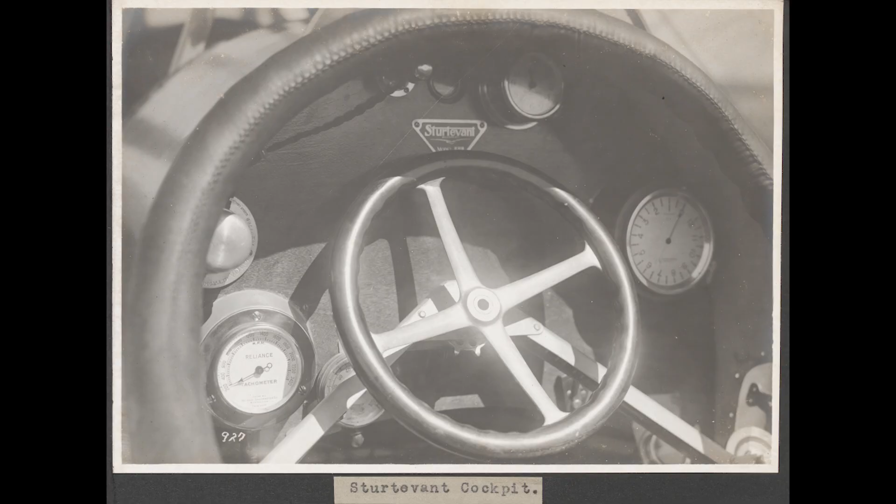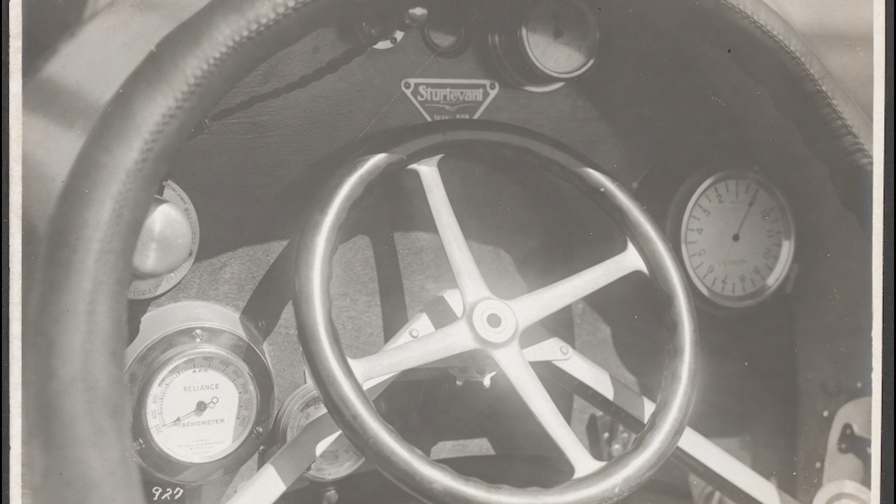Suddenly, chaos and blindness, crashing roar, a sense of shaking, tearing disintegration of the very vitals of the airplane, a stifling odor of heated oil, a strange, unaccountable weight on the control stick. Through a dense burst of smoke, objects barely recognizable as bits of smashed engine were glimpsed in flight. The roar passed, snatching away with it the comfortable purr of the engine.

Emerging from the smoke cloud, with faces and goggles streaming with oil, and only the faint whistle of the wires sounding in deafened ears, they planed helplessly towards the water. As they neared it, the pilot pulled the control stick back. The ship plumped in with a blinding burst of cold salt spray, bobbed up, and floated tail high. A friendly fishing boat picked up the airmen and landed them safe and sound ashore.

Their telegram to the headquarters of the Army Air Corps set many wheels in motion. It was not the first time that one of the new metal propellers had burst in flight and torn the engine to bits. Something had to be done to keep such accidents from marring the splendid record of accident prevention that was being established by the Air Corps.

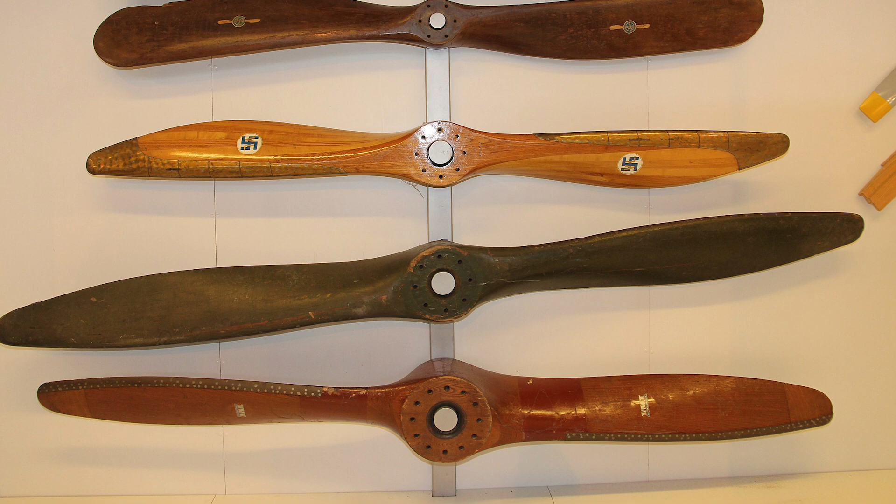To understand what was done, one needs to know what a propeller is and how it works. Of course, everyone knows that the propeller is the thing at the front of the airplane that goes around with a loud noise and blows dust in one's eyes as the machine turns around for the takeoff. But there are other viewpoints. To the pilot, the propeller is the thing that the mechanic pulls to start the engine. Once started, its speed lends invisibility, and he does not think of it again until his right leg becomes numb from holding the rudder bar against the unbalanced pull of the swinging blast of air that comes back from the propeller and is called the slipstream.

To the mechanic, the propeller is a treacherous beast that is always ready to leap from his hands and shatter arm or leg incautiously put in its path. And the leash, upon which he must depend for its restraint, is a slender ignition wire running to the switch controlled by the pilot as he sits in the cockpit. Even when the switch is off and the engine is cold, experienced mechanics do not stand under the propeller, for this is unlucky, like walking under a ladder.

To the surgeon, the propeller is a huge whirling invisible cleaver that can amputate limbs more quickly than he, though not so neatly. Cases are on record wherein individuals have committed suicide by throwing themselves into propellers of airplanes standing on the ground. A quick death, but rather messy.

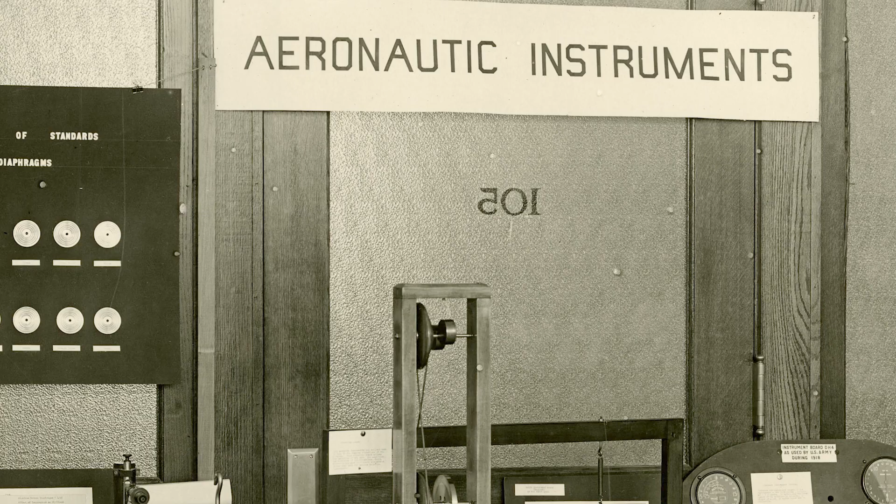To the aeronautical engineer, the 1,000-pound forward pull of the propeller is like a sum of money that must be stretched to cover more than it can possibly buy. This pull is all that he has wherewith to overcome the air drag of wings and fuselage, struts, wires, and wheels. When the airplane that he has nursed into being from the first rough sketch is at last completed and leaves the earth, every bit of air resistance here and there takes its toll from the propeller pull and holds down the speed. And the cry is always, more speed, more speed.

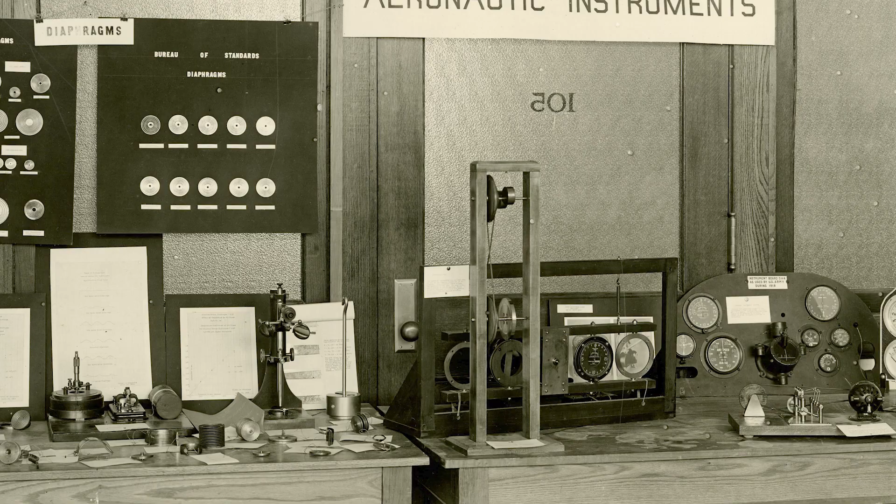How many laymen have any conception of the days and nights that the engineer slaves at his drawing board, scheming how to eliminate this part, how to pare down another, how to squeeze something else inside the already overcrowded fuselage, all done that the precious propeller pull may be hoarded for the task of drawing the wings to the highest possible velocity.

To the moving picture director, the propeller, commonly called the prop by flyers, is also a most convenient prop in the theatrical sense. The gentleman of short sleeves, reversed golf cap, and megaphone discovered long ago that propellers produce small but potent hurricanes, which can be used to toss things about and produce various novel and striking effects. Hence he has invested in antiquated but still serviceable propeller and engine combinations without any airplanes attached to them, which he calls windmakers. These are placed just outside the field of the camera.

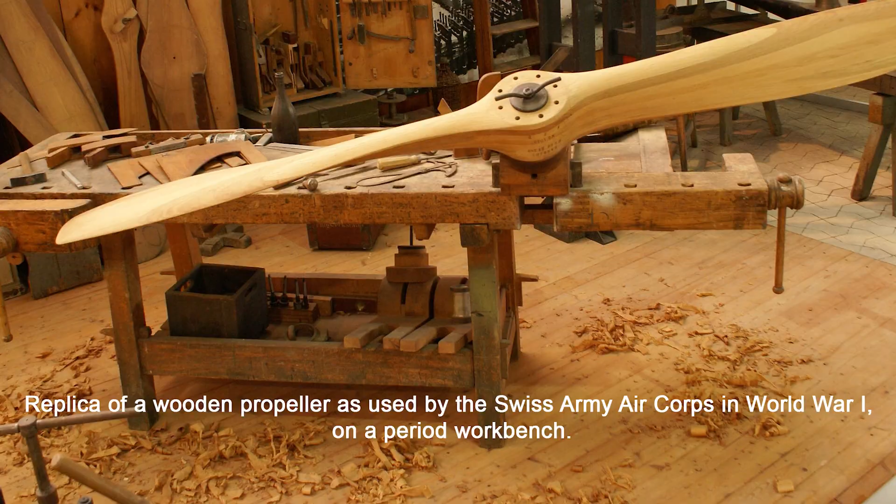A few shovelfuls of sand tossed into the air blast create a howling Sahara storm. A fire hose turned into it produces a tropical cloudburst illustration, or by substituting a garden hose, the scene may leap the seas and land in a driving spring shower in some temperate climate.

Until recently, virtually all propellers were constructed of wood, and failures through bursting in the air were almost unknown. The air screws used in the great fleets of planes employed in the World War were made of walnut, birch, mahogany, or other wood, and were very trustworthy. They broke if the blades hit chunks of mud thrown from the wheels while rolling, but rarely made trouble in the air except in the case of one particular type of airplane, the French Salmson, used extensively at the front during the World War.

The Salmson had a bad trick of breaking the bolts which attached the propeller to the engine. The loss of 1 or 2 bolts did not matter, since 8 are provided, but the bolt end invariably dropped so as to be struck by the whirling propeller, thereby breaking a strip of wood from the edge of one blade. A mere sliver of wood weighing a few ounces, but this small loss of balance between the blades produced surprising results. Picture the utter bewilderment of the inexperienced Yankee pilot when his airplane suddenly vibrated from end to end like a giant massage machine.

The unfortunate flyers, unable to see or think while the terrible shaking continued, felt there was but one thing to do: to stop the engine and land on whatever might be underneath. However, after making a safe landing, correction of the balance was easy. It was only necessary to whittle away the hard wood of the unbroken blade until a piece the size of the sliver torn from the opposite side had been removed. By that time, the hands of the whittler would be well blistered, but the propeller would run quite smoothly, enough to take the airplane to its destination.

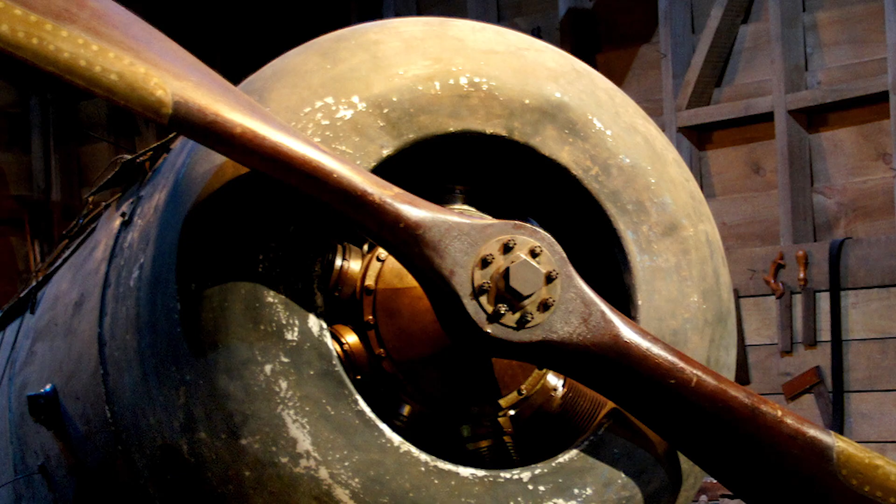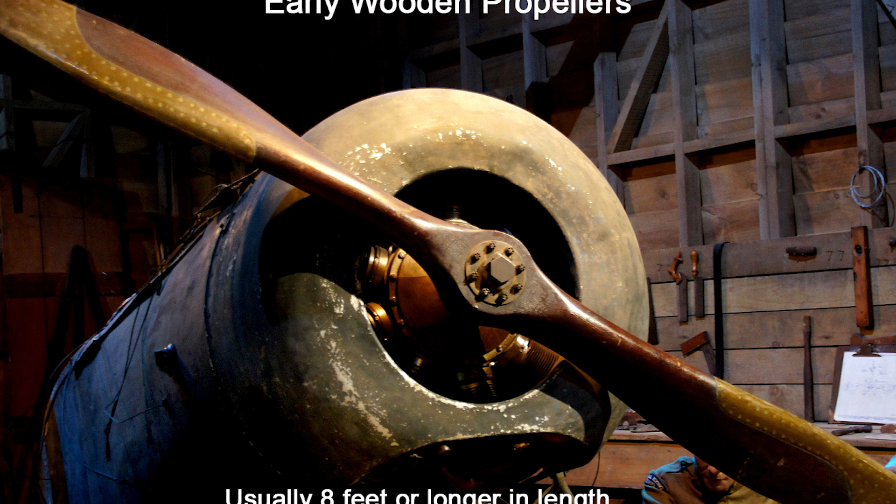To be strong, the blades should be thick if made of wood. But thick blades waste too much power when rotated at present-day speeds. At full power, the tip of a modern propeller rotates through the air at a rate of 12 miles per minute, 720 miles per hour. At such speeds, raindrops bite away the wood like bullets. A change to metal had to be made. Steel proved much too heavy, but the newly discovered alloy called duralumin made the change easy, yet brought new problems. Duralumin was just what the word means, hard aluminum.

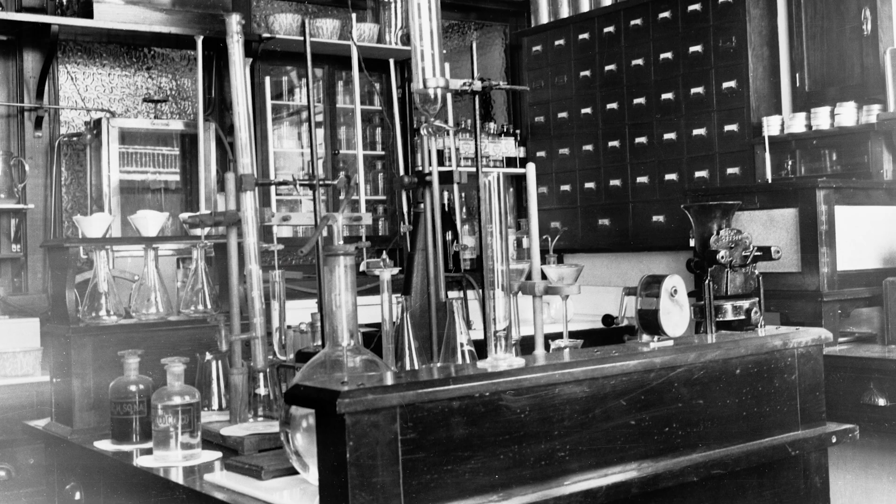It was never heard of until, during the war, a German Zeppelin caught while bombing London draped its shattered and tangled length across 2 or 3 hills of the English countryside. Pieces sawed from the intricate metal structure were tested. They proved almost as strong as steel and nearly as light as the soft and untrustworthy pure aluminum which was so widely used. Chemists were called upon, and in a day or so they reported the exact composition of the new metal. It was an alloy consisting primarily of aluminum with copper and some other metals added in certain quantities. Every trace of substance which entered into it was known, and it could be easily duplicated, they were sure.

A batch of the alloy was melted, cast, and rolled into sheets. It was worthless. For months, experts worked day and night to solve this puzzle and make the new and valuable alloy available to the Allies.

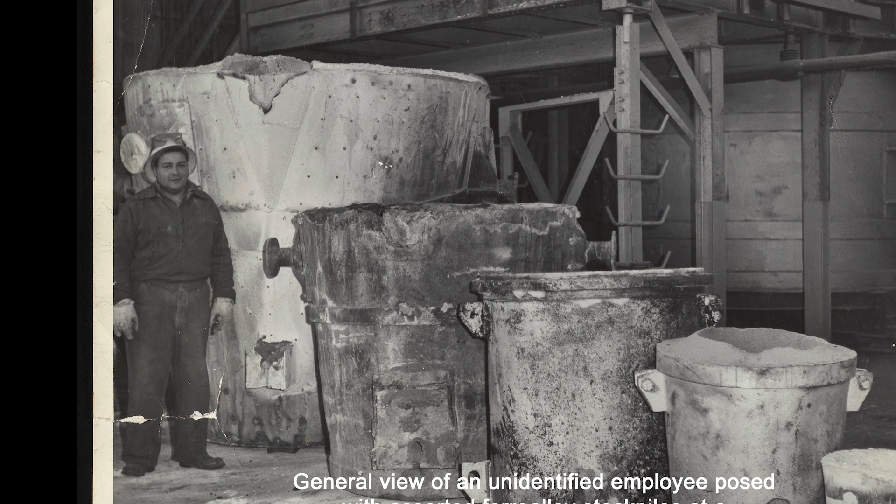It was an unprecedented mystery that confronted the chemists and metallurgists. They could absolutely duplicate the composition of the German metal, but their products were like a different substance, little, if any, better than pure aluminum. They were either soft, brittle, or apt to crumble after a period of use.

The final discovery captures the imagination. One can picture the weariness and disgust with which some metallurgist threw the perhaps 10,000th piece of metal on the bench, after testing and finding it as soft and worthless as its predecessor, and his amazed incredulity on returning a few hours later and finding it hard and strong.

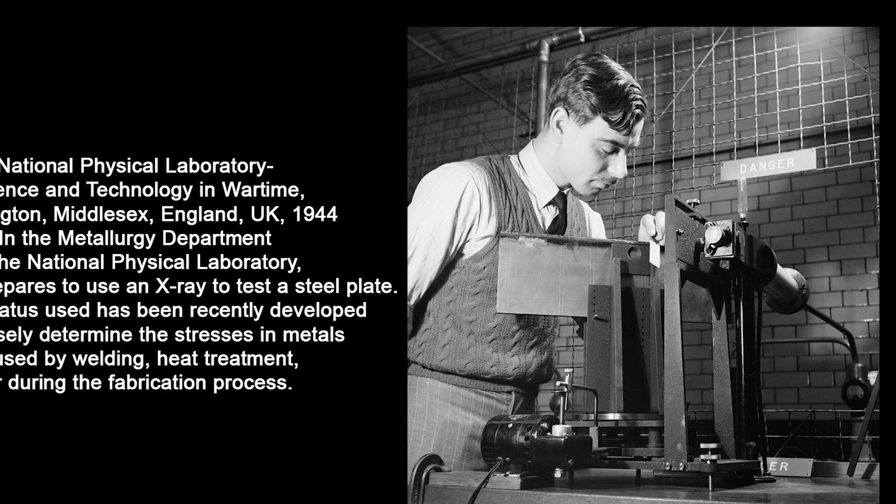Doubtless, he first thought it was a practical joke, then retraced his work on that particular piece to see what unusual feature of its manufacture and heat treatment was responsible for the unheard of phenomenon of a metal which on its own accord changed its temper and toughness while simply lying on a bench. The exact steps that led to the final perfection of the process of heat treating duralumin are one of the mysteries of the war, but the process itself is no longer a secret.

The aluminum alloy must be kept heated nearly to a dull red by immersion in a bath of melted potassium nitrate for a certain period, then be quenched in a cooling bath. The exact temperature of the potassium nitrate is very important, as a difference of 10 degrees will seriously affect the finished metal.

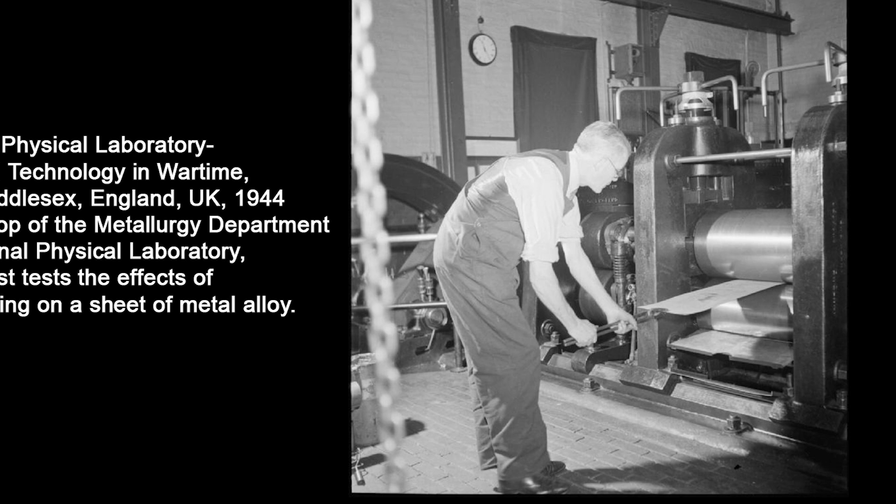After the quenching, the cooled metal is soft and easily formed into various shapes, but this must be done quickly. For an hour it retains its softness, while mechanics work feverishly to bend, twist, and form it to the exact shape of the airplane part which is required. A short time after an hour is up, it has become strong, hard, and inflexible like a different metal.

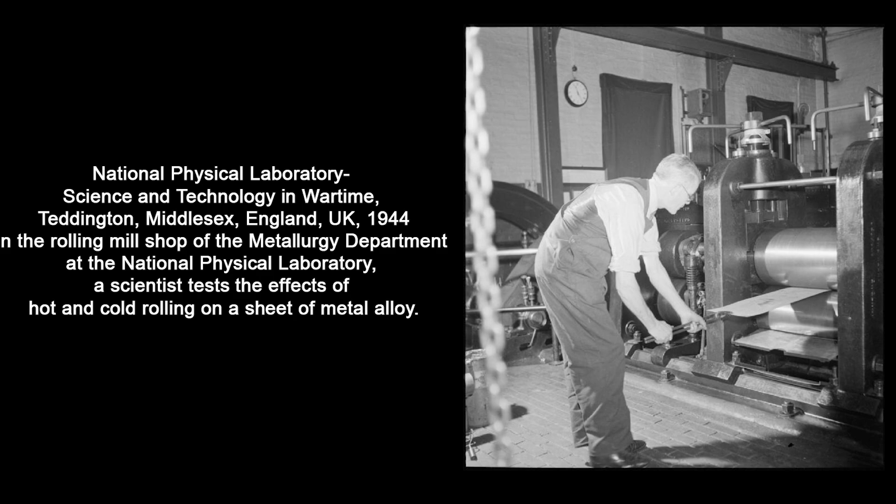It must be understood that heat is not applied during this process, and the hard piece is not necessarily cooler or hotter than when it came soft from the quenching bath an hour before. The process described is that employed in the manufacture of ribs, spars, and other light parts of the aircraft, but in making propellers, dies are used to shape the heavier metal to the exact shape desired, which would be almost impossible if it were worked by hand.

Shortly after the war, an American inventor made the first duralumin propellers. The experts to whom he submitted his models were not much impressed, but consented to test them. Much to their surprise, these models behaved splendidly when subjected to the destructive whirling test, in which electric motors of many hundred horsepower rotated them faster and faster until the nerve-shattering roar could be heard for miles, and the blades finally tore apart and bit great pieces out of the massive timbers that guarded the test stand.

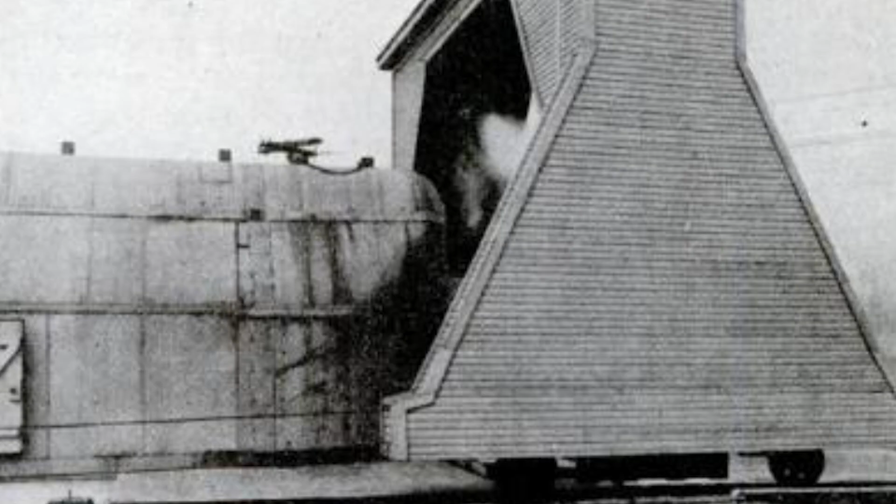The test rig, as it is called, is a curious device which merits description. The electric motors which provide the power are ranged in line inside a windowless structure unlike any known type of edifice. It is long, low, rounded, of indeterminate color, and appears from a distance to be a huge mound of earth. The roof is of heavy iron. An iron door provides entrance, and the shaft for attachment of propellers projects through one end. Around this end is a shield of very heavy timbers, like a wide arch.

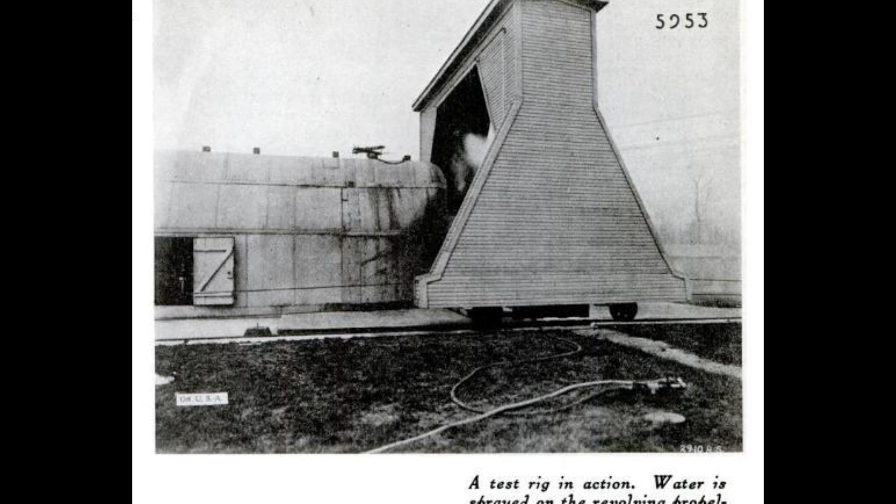Underneath this structure, the earth has been excavated and replaced with massive masonry, which is tunneled with passages and rooms. One of the rooms is directly under the timber shield, and a narrow slot in the concrete ceiling gives a tiny view of the propeller rotating overhead. Through this slot, observers with delicate instruments watch each propeller during test and measure the deflections of the blades as the speed of rotation is pushed higher and higher. A heavy iron shield is provided for closing the slot before the propeller actually bursts.

It was soon found that airplanes on which duralumin propellers were mounted were capable of greater speeds than had ever been obtained before, and large numbers have now been placed in use, although they cost more than $400 each, whereas the old wooden type may be purchased for $100.

The extra expense is considered justified, as other things being equal, the fastest plane will win an air battle or commercial supremacy, as the case may be. However, shortly after their use became general, trouble developed. The new propellers began to go to pieces in the air.

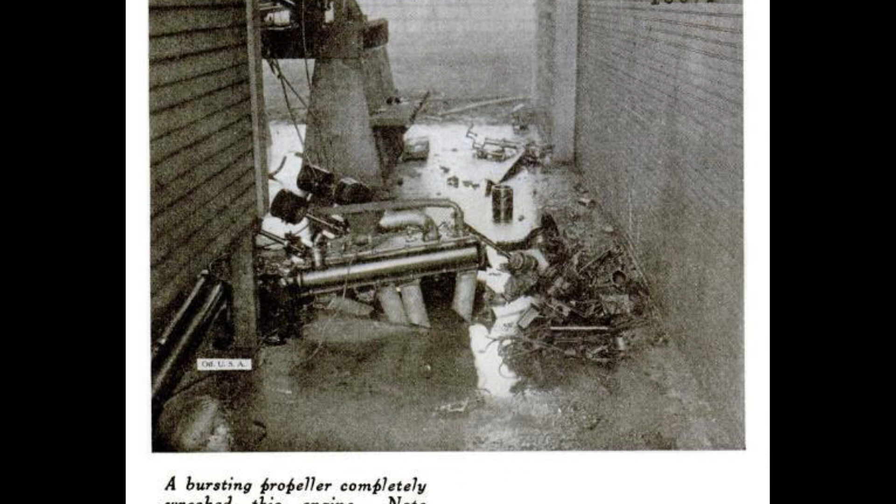Centrifugal force causes each blade to pull outward with a force of more than 20 tons when the engine is at full speed, although the blade itself only weighs about 30 pounds. This does not cause vibration because each blade pulls against the other, and in manufacture, both blades are made exactly the same weight, tested by balancing the propeller on knife edges so delicate that the weight of a fly would be indicated.

Since any difference of weight between the two blades is multiplied by more than 1,000 times by centrifugal force, such slight lack of balance as results from the application of an extra coat of varnish to one blade will produce an unpleasant vibration. If one blade breaks off entirely, the 20-ton whirling pull of the other blade instantly shatters to pieces the light but sturdy engine to which it is attached.

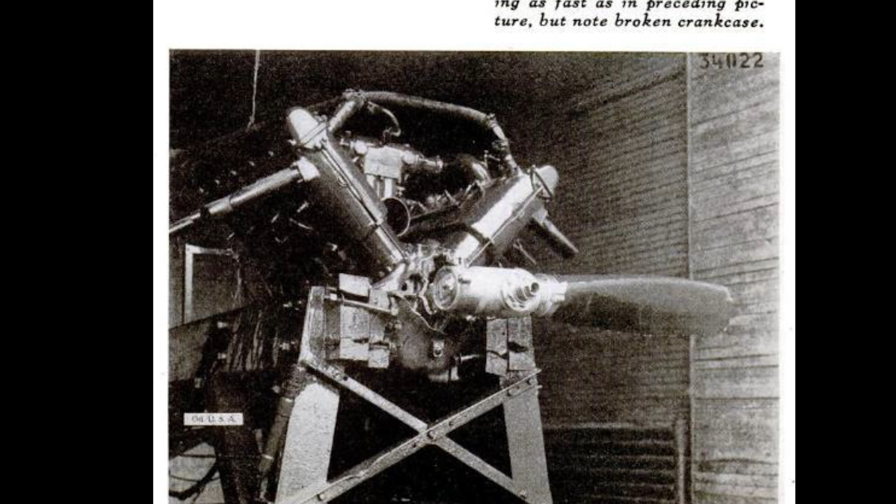The break of a blade may be due to flaws in the metal, since in forging the blades invisible seams are sometimes formed which extend through the propeller from end to end. These seams cannot be detected except by cutting off a piece of the metal, so the problem has now been solved by forging each propeller with a projecting portion on one end, which is cut off from the rough forging and tested. If any pores are found, the forging is scrapped.

Most breakages have not been due to flaws in the metal, so much as to what is called fatigue failure, which is explained as follows. All solid metal is composed of tiny interlaced crystals. In fatigue failure, the crystals gradually separate at points where the metal is heavily stressed. Tiny cracks slowly form and run together, and a break eventually follows.

Vibration is the great cause of separation of the crystals because of the almost imperceptible but continual bending of the metal which vibration induces. Hence, fatigue failure is frequently noticeable in such thin metal objects as automobile fenders, so often marked with spreading cracks. Wood is immune to fatigue failure, so propellers did not break from this cause until they were made of metal.

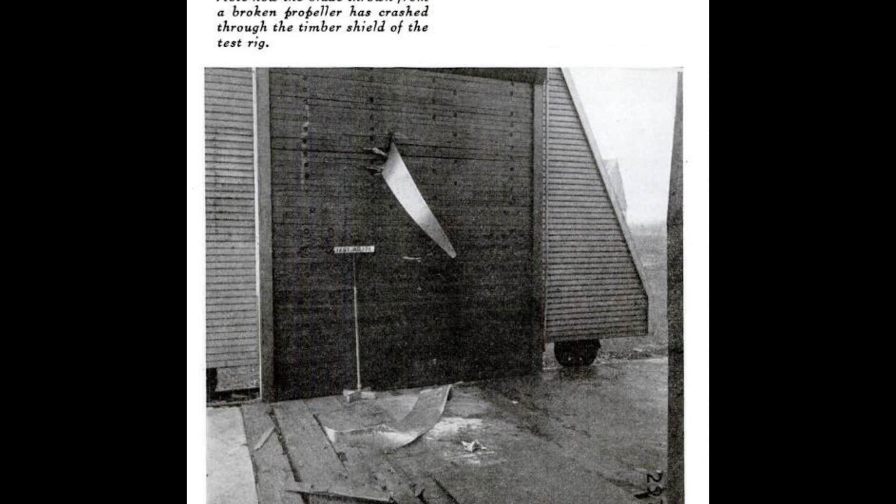Duralumin is particularly susceptible to fatigue failure, and the barely noticeable fluttering of the rotating blades is apt to cause tiny cracks after a few million revolutions, and in the course of additional millions of revolutions, such cracks develop into actual breaks.

To catch fatigue failure before it becomes serious, it is only necessary to examine the surface for cracks after a certain number of revolutions. For convenience, the inspection is required every 100 hours. Since modern propellers revolve at speeds frequently exceeding 2,000 revolutions per minute, 100 hours of flying is equivalent to more than 10 million revolutions of the propeller.

Unfortunately, the cracks are not distinguishable, even with a powerful magnifying glass, without special treatment of the surface. Hence, in the examination, the surface is etched or eaten away slightly with a solution of caustic soda, then brushed with nitric acid and rinsed with water. This causes any cracks which have formed to become distinctively visible.

The Army Air Corps recently sent orders to all its stations to etch and inspect all duralumin propellers immediately and after every 100 hours of flying thereafter. As if to prove the necessity of this measure, another accident occurred before it could be put into effect. An airplane was being tested at 200 miles an hour when an explosion-like disintegration of propeller and engine occurred, as in previous cases.

The pilot jumped, opening his parachute as he left the ship, which was only 150 feet above the ground. Luck was with the pilot, as the parachute opened before he hit, and he landed safely, while the airplane, speeding without guidance, crashed at the very door of its hangar.

Such accidents will not occur in the Air Corps in the future. The inspection by that branch of the service revealed cracks in many propellers, which were immediately condemned. With etching and inspection now required regularly, pilots wing their way, confident that the efficient metal propeller will not run amok and wreck the ship.